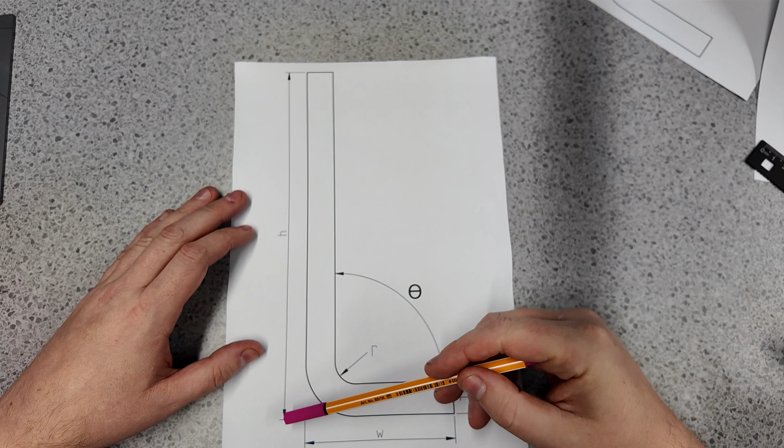So if we take our annotated drawing here, we'll always work with the outside dimensions, because if you've got a complicated bend, it might not be possible to measure the inside dimensions, and it makes the maths easier.

There's an angle that we want to bend. And then, as I mentioned before, there's this inside radius, which, depending on what we're making, may or may not be critical. But we've only got a few finite choices of this, depending on the tooling anyway.

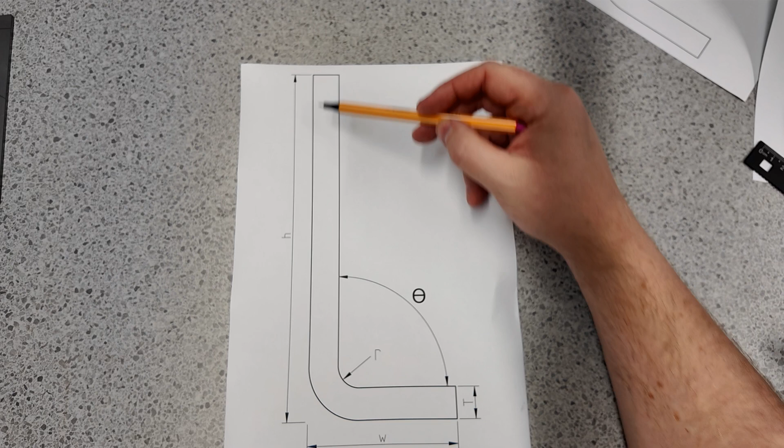I just want to emphasize what the mould point is. So this dimension from here to here, h as is shown, we could measure with, depending on the size, a big pair of calipers, a tape measure, or a height gauge. But the inside measurement, as I said, can be harder to measure.

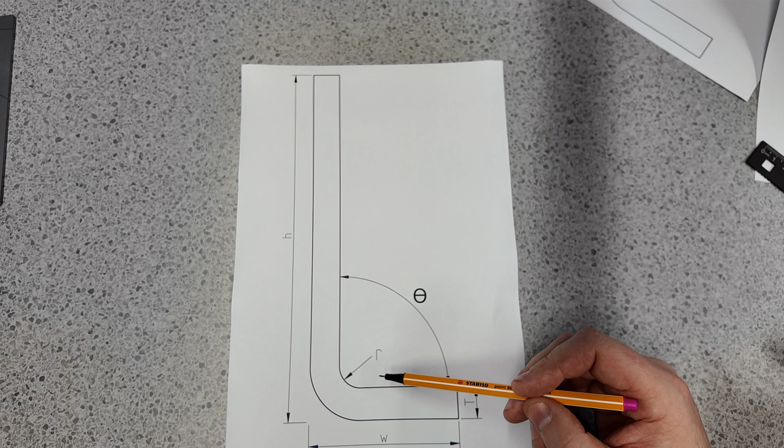And then there's the material thickness as well. So the combination of the choice of material thickness and the tooling, which will affect the inside radius, affects the inside radius. So let's get on with deriving it.

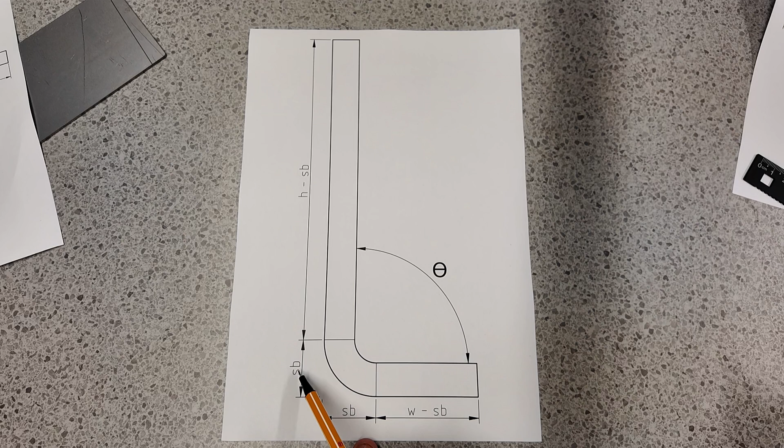This is the same drawing I just showed previously, but we've got some more annotation. The strategy is to compute this value here and here, which is the offset in each axis, called the setback. We're going to subtract that from h, subtract that from w, and then add in some material to account for the fact that there's a curve here.

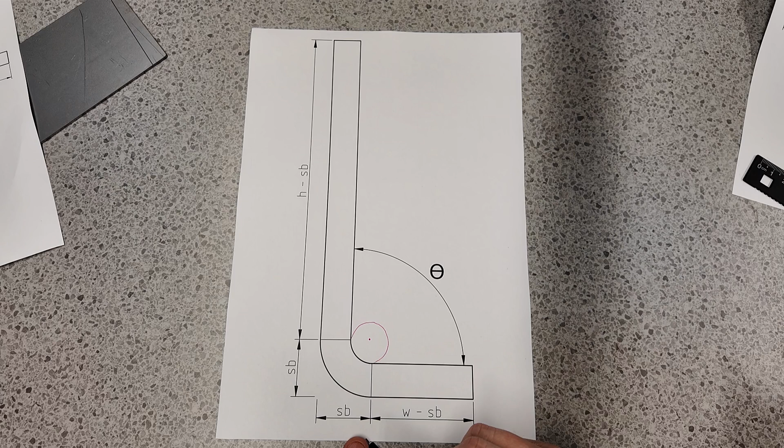The first thing to note is that this is a radius, and a radius will have an origin, a center. So we can think of a circle, my very badly drawn circle here, that goes around here. For 90 degrees, we can easily see what the setback value will be if we pretend that I've drawn this properly.

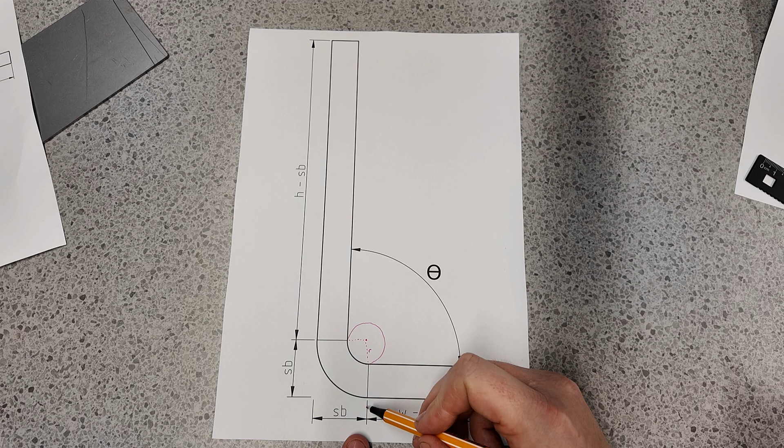We've got one here to here. Then we should be able to tell that if we know the radius of this circle, that's r, you can see that this setback, and that's r as well obviously, this setback is r plus the material thickness. So for this 90 degree case, the distance from here...

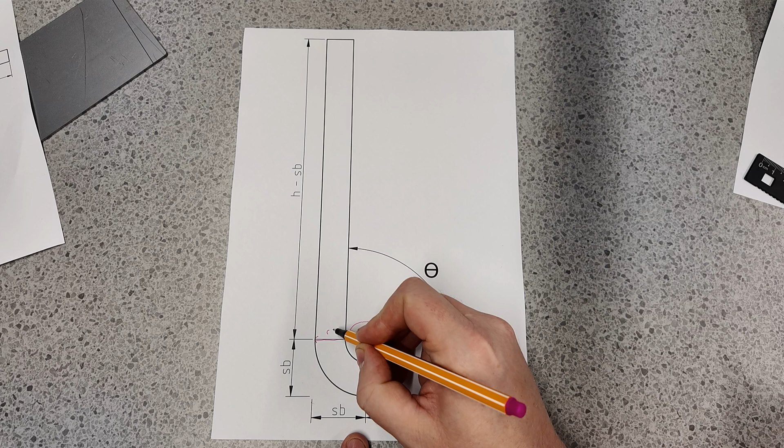...all the way out to here is r plus the material thickness t. And similarly, because it's 90 degrees, this one here is r plus t. So this one is r plus t as well. So for the 90 degree case, we can say that the setback is r plus t.

Now, what happens if this angle was not 90 degrees? That's the next thing to consider. So what about when the angle isn't 90 degrees?

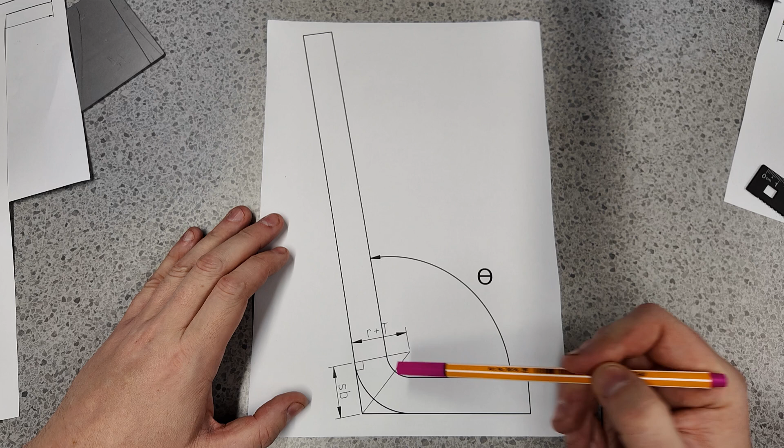So I've actually drawn this as 100 degrees here. So one side of this triangle is still the radius plus the material thickness, but the other side is no longer equal to that. So we have to compute this based on what we know.

So we know that this angle here is half of this angle, because we're assuming that half of the material goes into that side of the bend and half of the material goes into this side of the bend, and we're going to bend it in the middle.

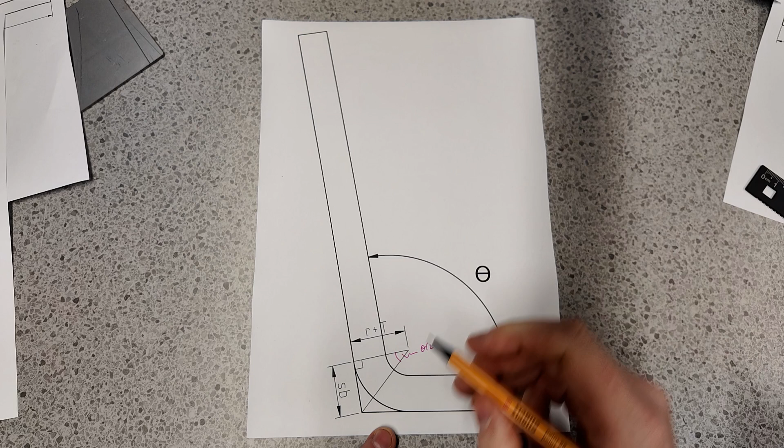So we can use the basic rules of right angle triangles. We know that for this particular triangle, where this angle is theta over 2, tan of theta over 2 is equal to the opposite over the adjacent.

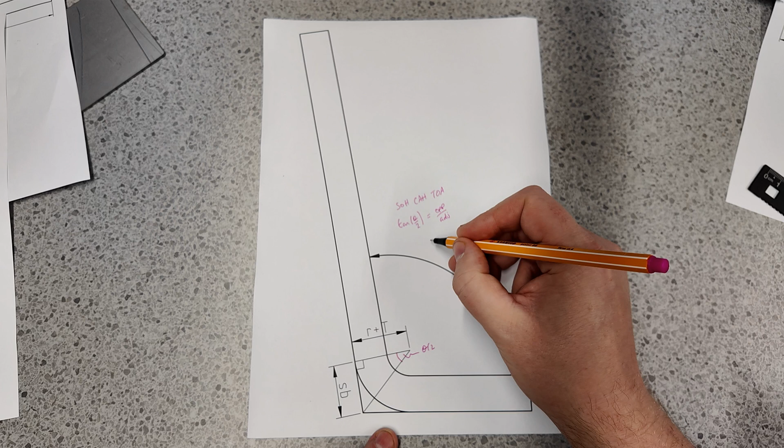In our case, the opposite is the setback, and the adjacent is r plus t. Therefore, the setback is r plus t times tan theta over 2.

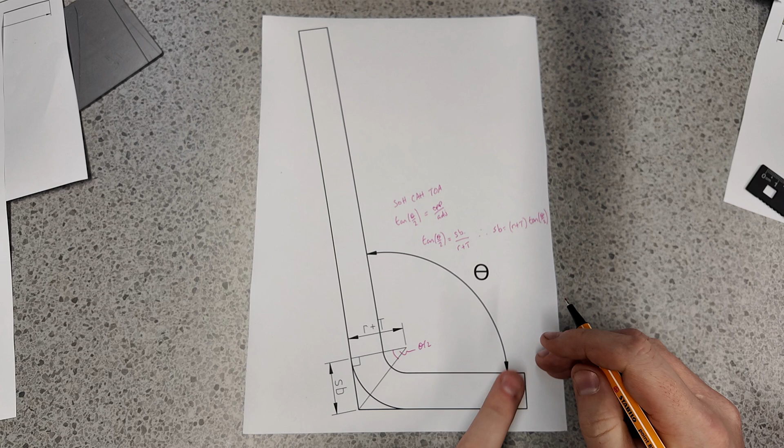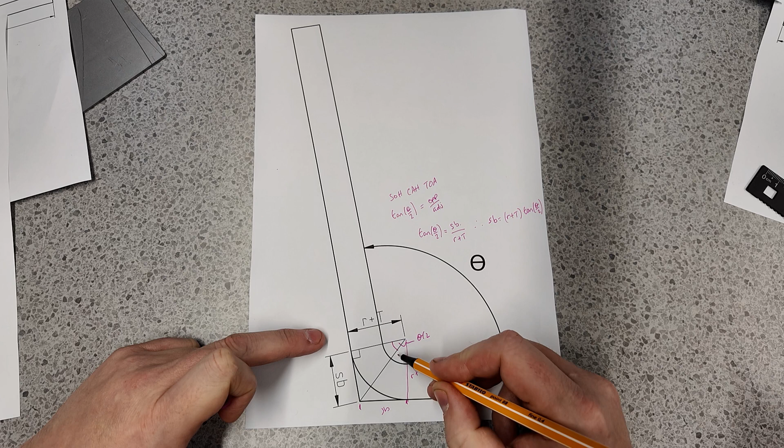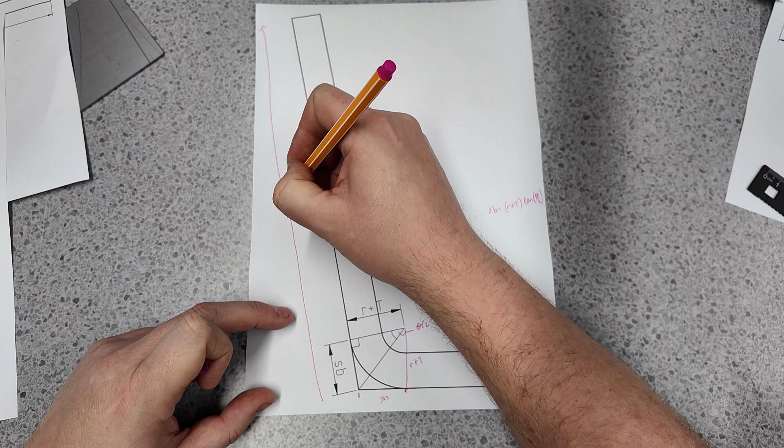This whole side here is h, and this is w, from the mould point all the way to the end. So what we've got to do is our flat length is going to be h plus w minus 2 times the setback.

Plus some material, some length to allow for this material that's going to be stretched around the bend. So plus something, and that's normally called the bend allowance.

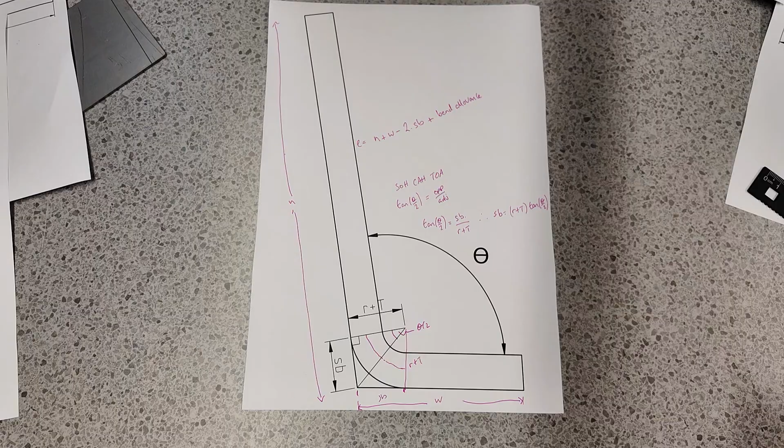Just to write that out: h plus w minus 2 times r plus t, tan theta over 2, plus bend allowance.

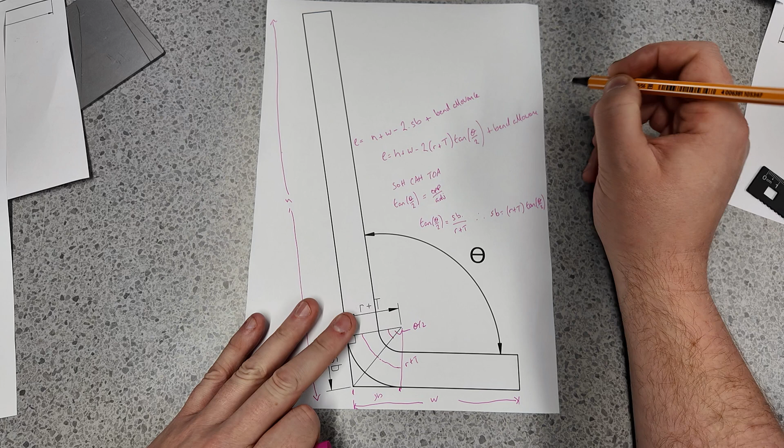Just to make that a bit more readable, this is where we are so far. We've got our outside dimensions h and w. We subtract the setback, and then we have to add in the bend allowance, which we haven't computed yet.

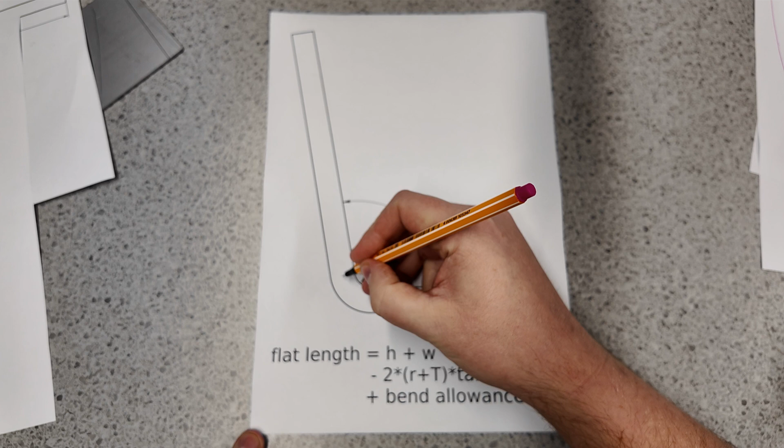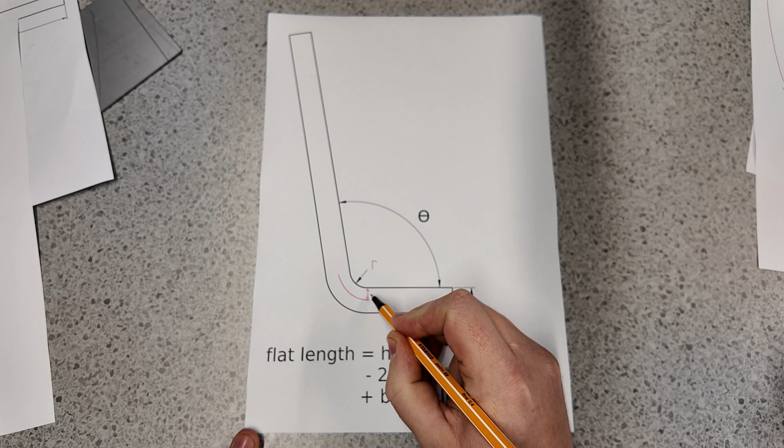So the bend allowance is very simple. It's just the length of the arc along what's called the neutral axis, which, depending on the material you're bending, occurs at different points on the metal. When you bend this, the outside stretches and the inside compresses, but there'll be a point some distance measured from the inside, between 0 and 1. If you were here, you'd be right on the inside, and here on the outside.

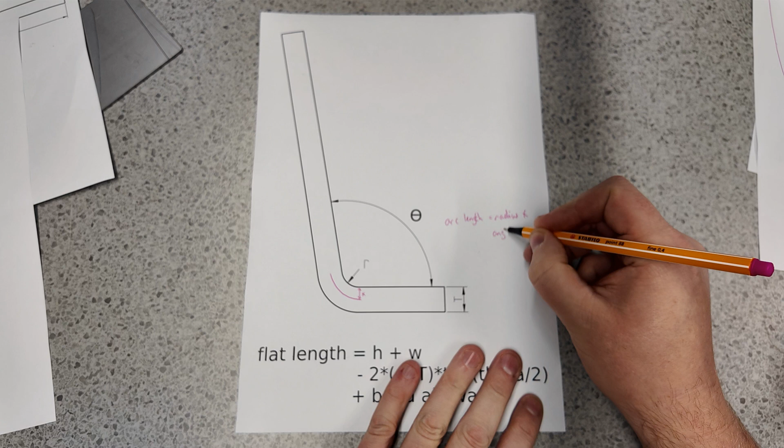So that's k, between 0 and 1, and then it's just the length of that arc. So we know that arc length is just the radius times the angle in radians.

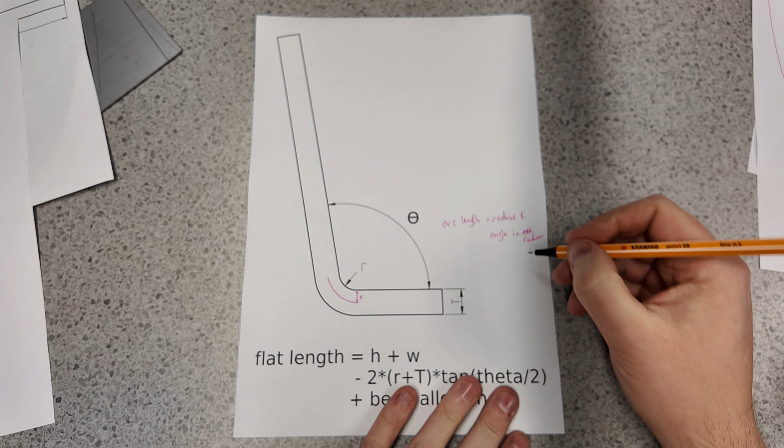So the question is, at what radius does this arc come out? Now that depends on the material and the particular batch of material and all sorts of strange factors. But for steel, 2mm steel anyway, that I get from the laser cutter, I've found that k is approximately equal to 0.4.

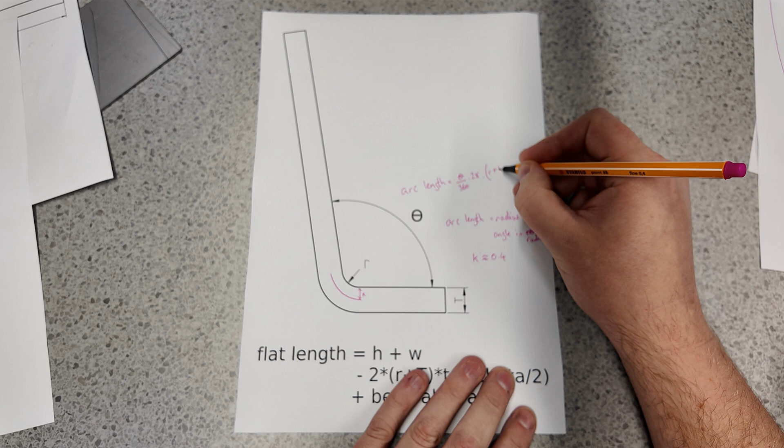So the length of this arc, the bend allowance, is theta divided by 360 times 2 pi times the radius, and the radius is the inside radius plus some factor k times t, where t is the thickness. So whatever fraction of t we are away from that is the radius measured from the origin of that curve. That gives us our final formula, which I shall show on the next slide.

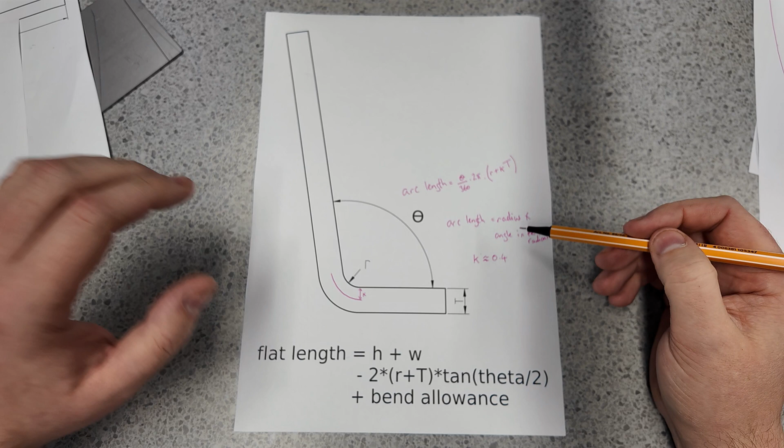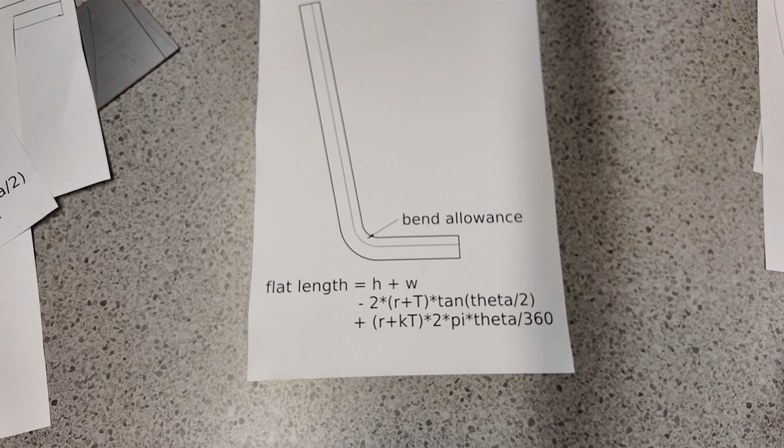So here's the final formula for an angle theta, 90 degrees or greater. This line represents a setback, this line represents the bend allowance, which I did draw in a different colour, but it only printed in black and white.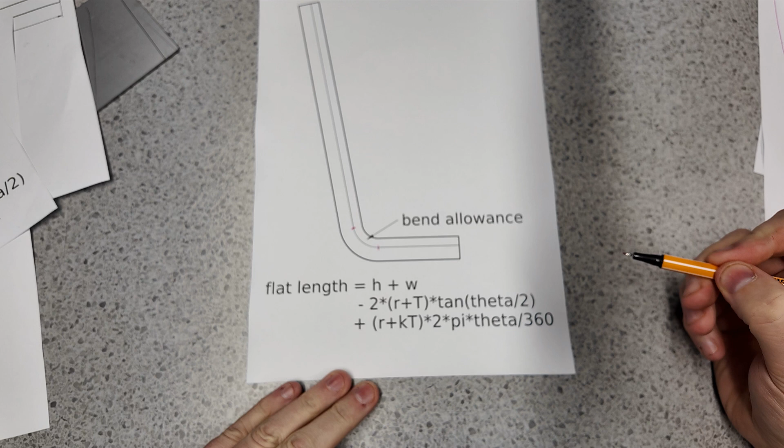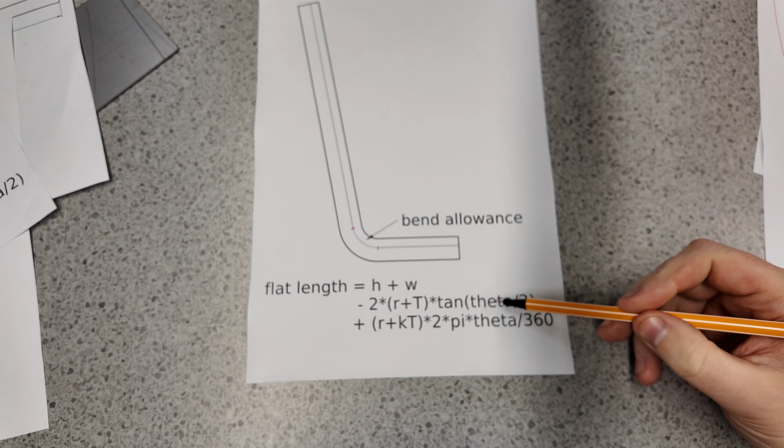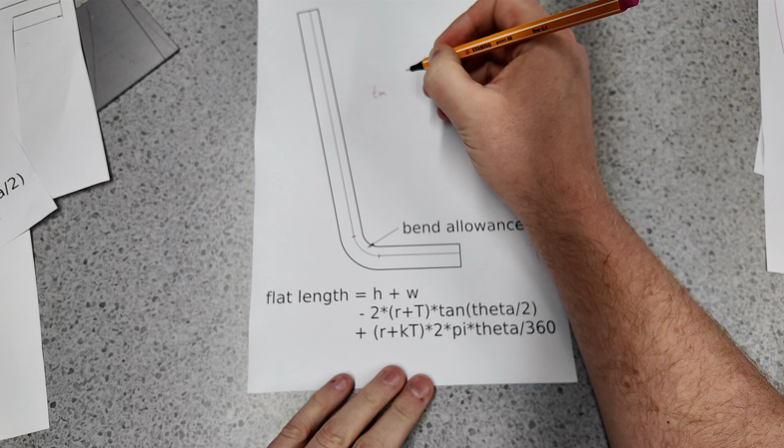And that's the formula. Now, we should be able to see that this will reduce a bit if we're bending for 90 degrees, because we know these will evaluate to something nice. So for theta equal to 90 degrees, that's equivalent to pi over 2, and tan of pi over 4 is just 1.

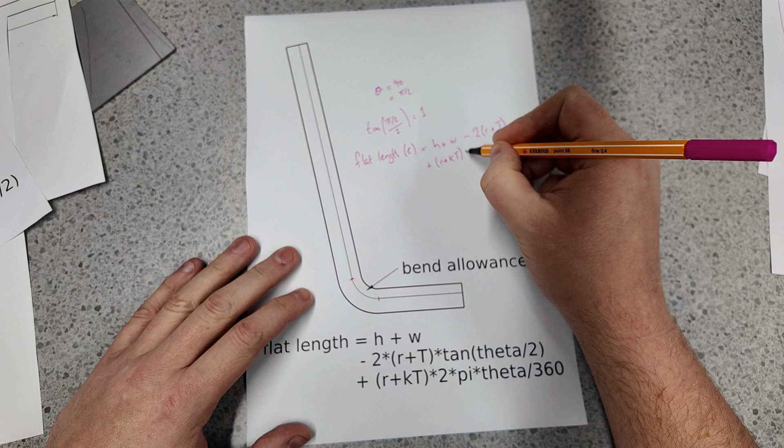That leaves us with our flat length, which I called L on an earlier slide: h plus w minus 2 times r plus t, plus r plus kt, and that angle term will just be pi over 2, which is about 1.5, since I'm assuming the angle was in radians. And that's how you compute the flat length.

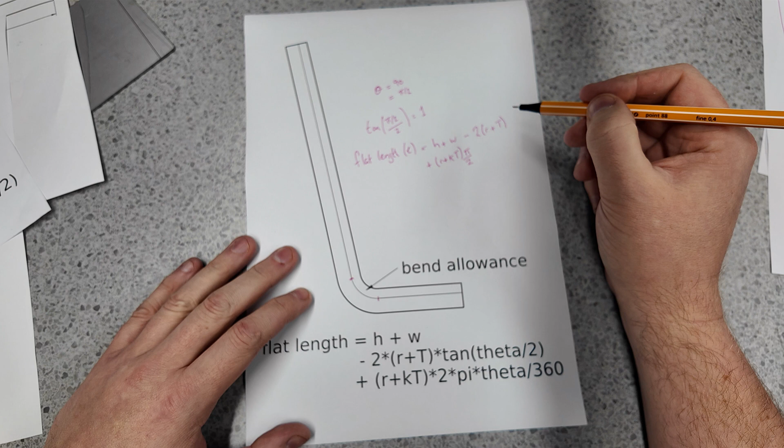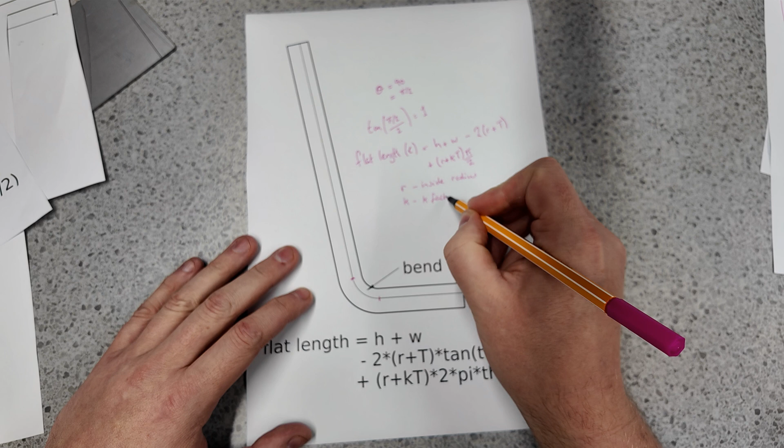So the things we have to decide as the fabricator are r, the inside radius, and k, the so-called k factor, which depends on our material. For the purposes of the demonstration I'm doing here, we're going to use 0.4.

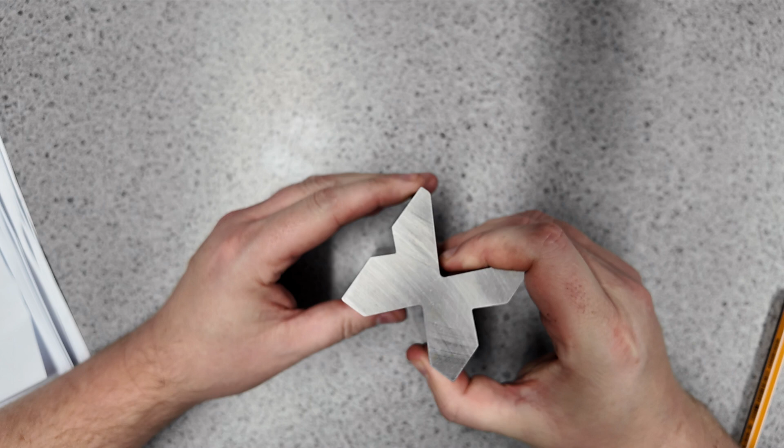One more thing before we do the worked example. I want to talk about how you calculate the internal radius of the part. This is defined, when you're doing this kind of air bending, by the width of the V.

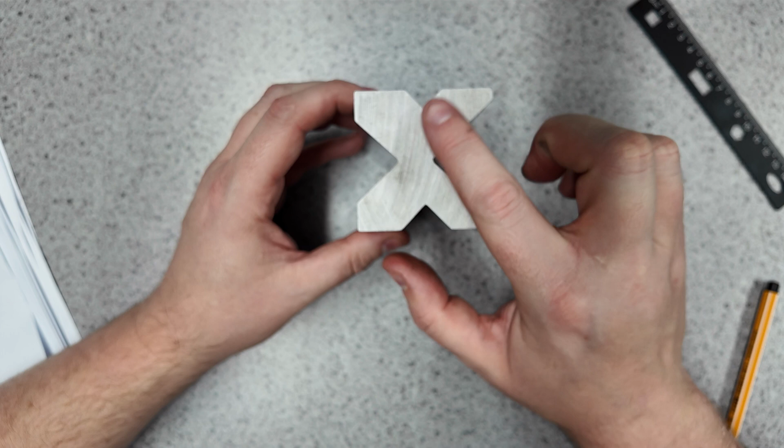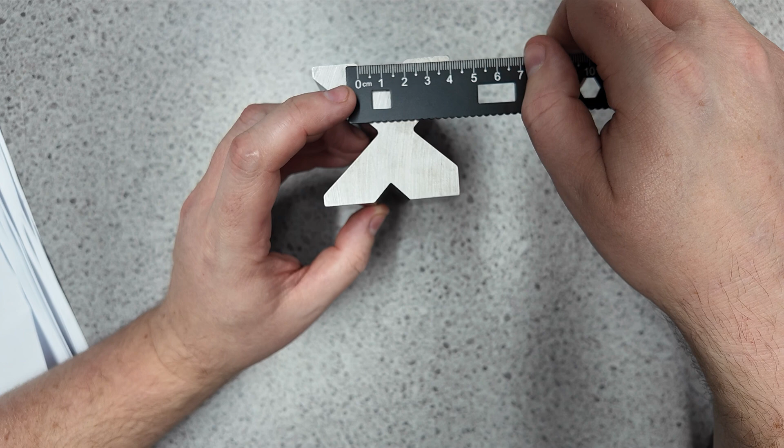This is a bottom tool, and we'll see it when we go to the press brake in a minute. It can be mounted so you can use one of any of these 4 V's, and the key parameter is their width. This top one is 16 millimeters wide, this one's 22, this one's 35, and this one's 50. For thicker material you have to use a wider V, otherwise you end up crushing and damaging the material.

For what we're doing, which is 2 millimeters, we're going to use the 16 millimeter V. There's a very effective rule for computing the internal radius based on the V width: the V width divided by 6 is the internal radius. So R equals V width over 6. I've found this to hold for all the sizes on this standard V, which is 16, 22, 35 and 50.

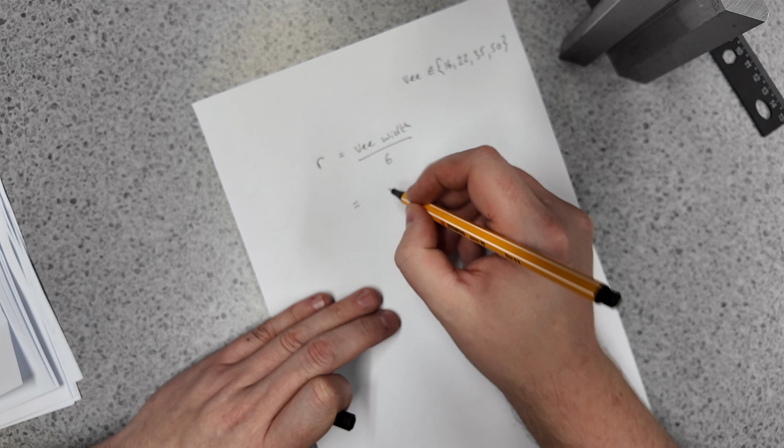So you can see that if you increase the width, you get a bigger radius. For the one we're going to do today, we're going to use 16 millimeters, so 16 over 6 is 2.67. Sometimes for 2 millimeters I also use 22 millimeters, and 22 over 6 is 3.67. This is the inside radius, and it should be fairly obvious from the drawings we've already done that the outside radius is just this plus the material thickness.

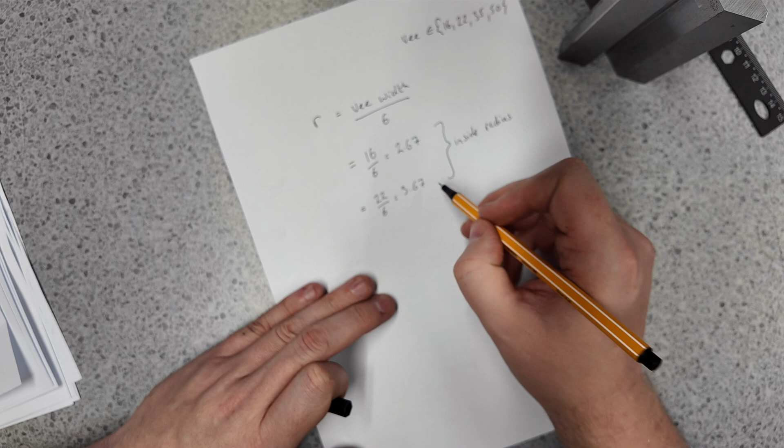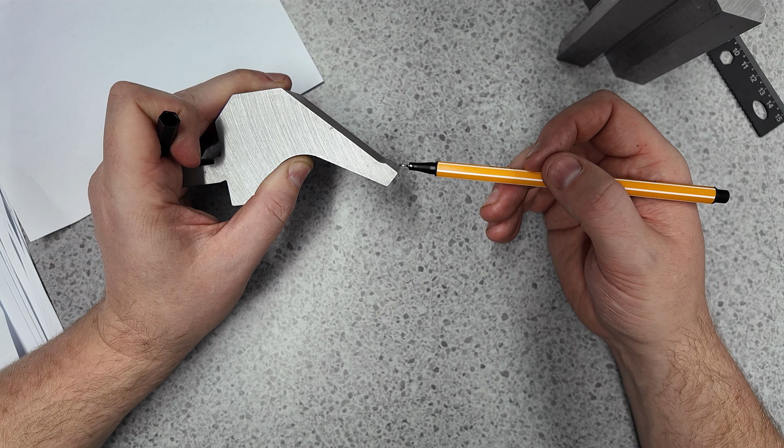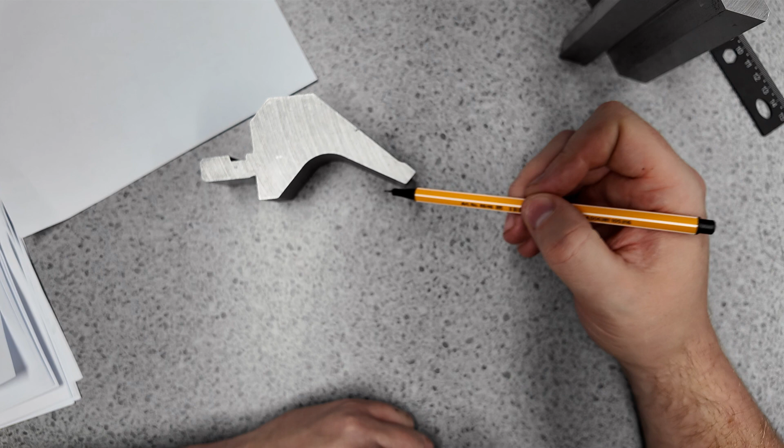The final point about the top tool: this has a radius of about 0.8 millimeters, and bending up to about 8 millimeter steel, I found it doesn't really matter—it doesn't impact your calculations at all. When you get to really big radii and things that aren't normal, this starts to have an effect. The top tool has more impact when making complex shapes and parts bend round and hit it. This is a gooseneck tool, so you can have some folding back, but straight tools are also useful, and you can get all sorts of elaborate shapes with holes in them, etc.

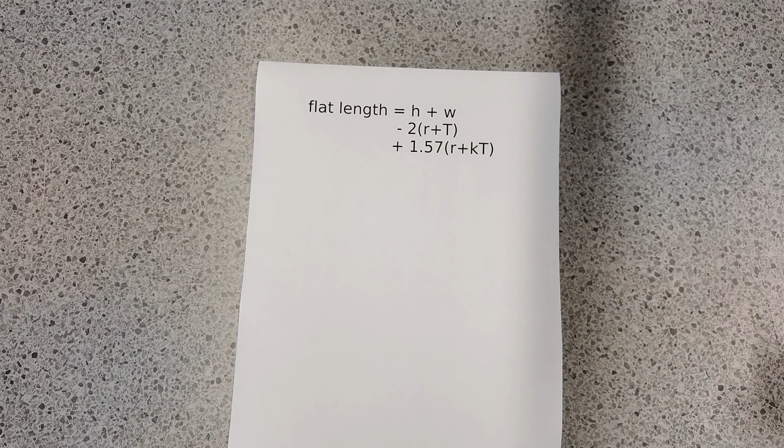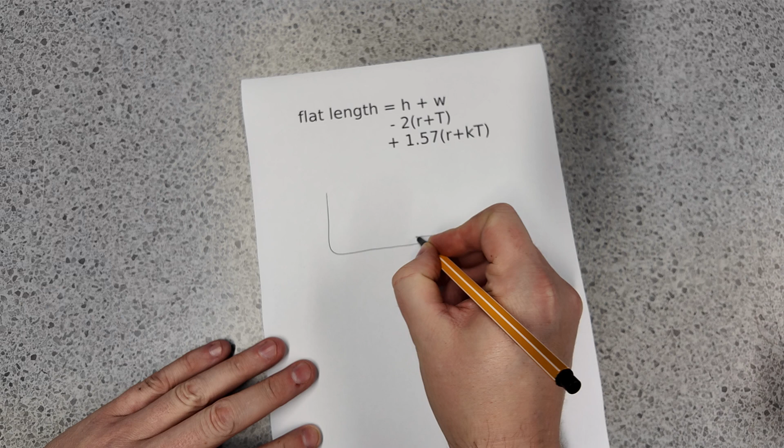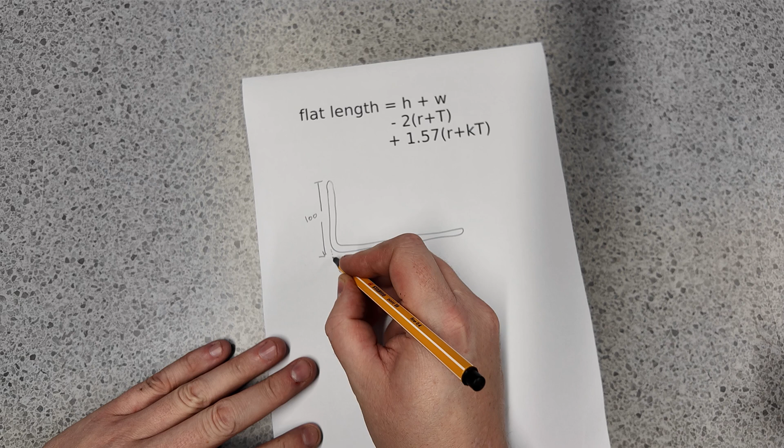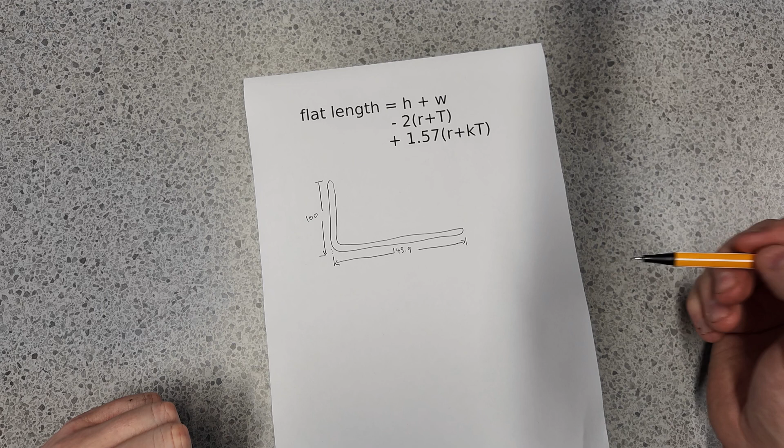Okay, so now we're going to do a worked example of a 90-degree bend, and I'm going to make up some numbers for our purpose of our example. So we want to make a piece in 2 millimeter steel, where this dimension is 100—remember, outside dimensions—so the imaginary mold line, and this dimension is 143.9. What we need to do is work out the length of the flat piece, get that ordered, which will happen magically because this is a video, and then we need to work out the point that we're going to bend it at.

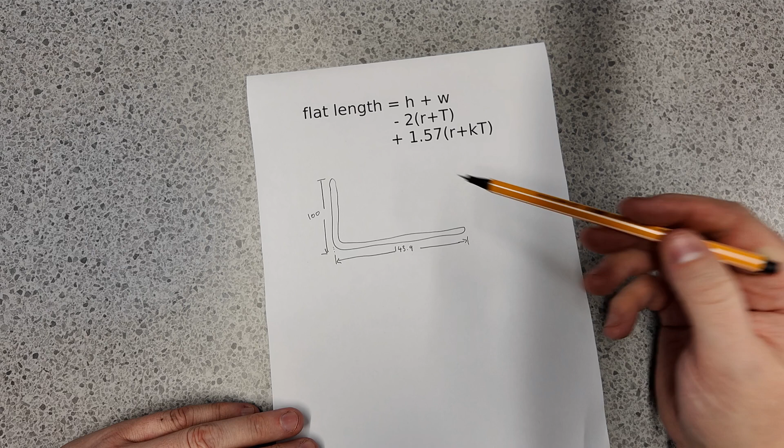So what do we do here? We've got h equals 100. Need to keep this square on for the camera. H is 100, W is 143.9. R—we're going to use the 16 millimeter V, so R is 2.67. The material thickness is 2, and the K factor that we're going to use is 0.4.

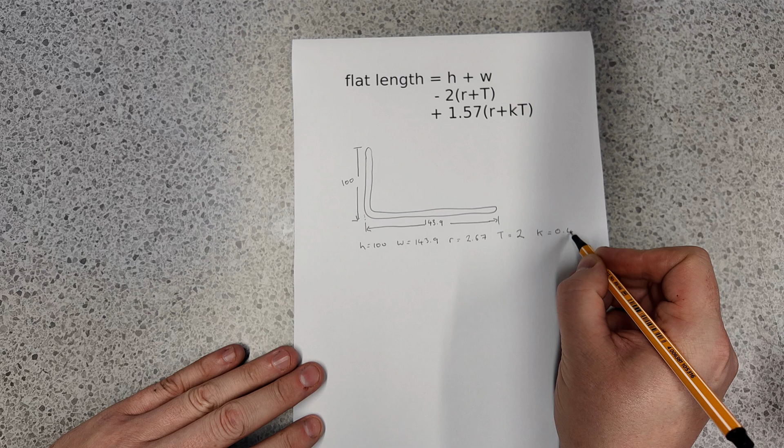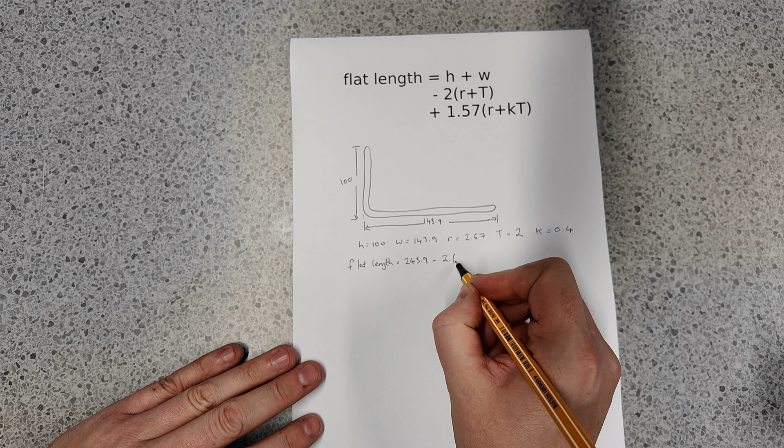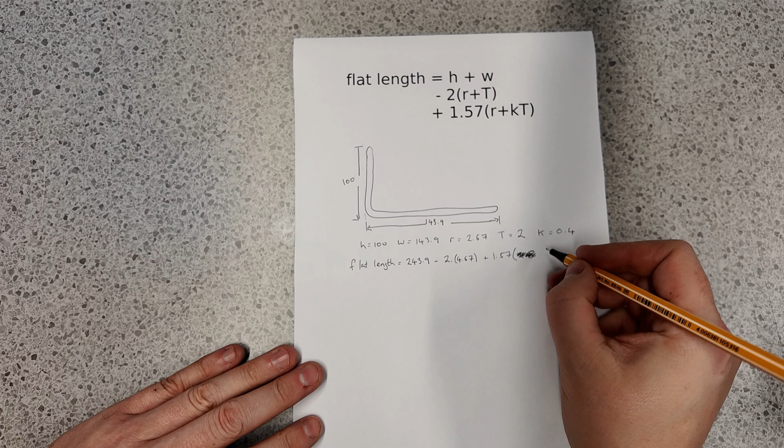So if you work this out, flat length is 243.9 minus 2 times 4.67, plus 1.57—that's pi over 2—times 3.47.

Okay, so we can work all that out, which I'm going to do on the calculator shamelessly. And all of that works out to be 240.0079, so we'll call that 240 millimeters. So we need a flat piece of steel that is 2 millimeters thick and 240 millimeters that way.

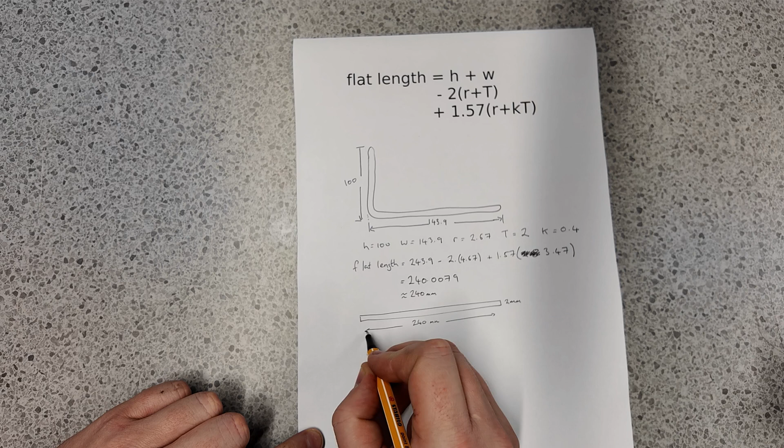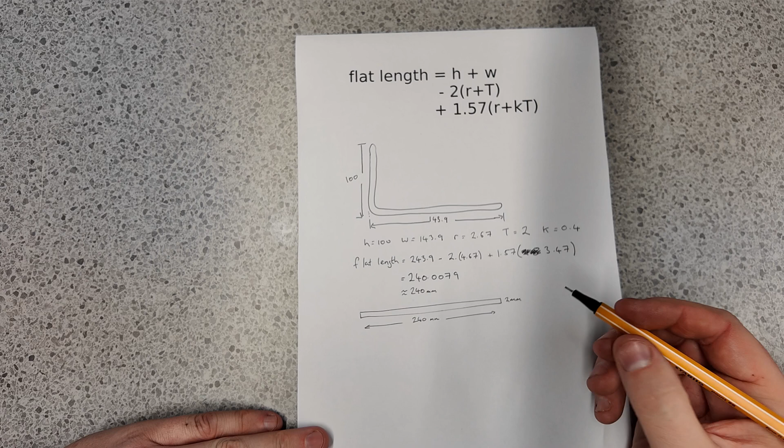And then the other dimension, the dimension into the page, doesn't really matter for the purposes of this example, but it does affect the bending depth parameter on the press brake. So I think the piece we're using today, the dimension into the page is 80 millimeters, although that doesn't affect any of the calculations we're doing here.

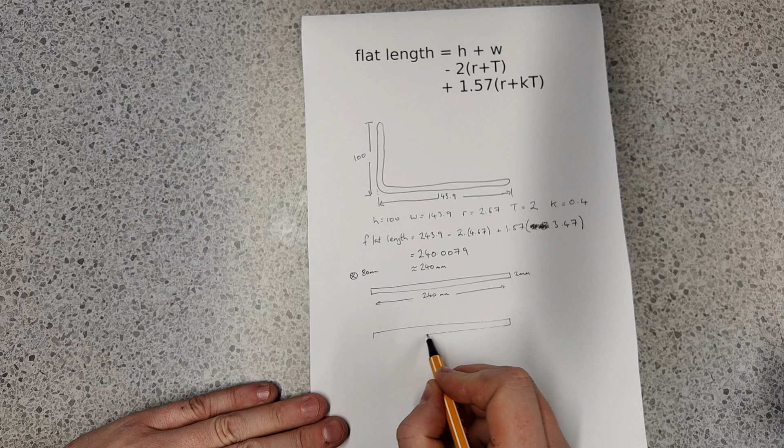So we know the length. Now we need to know the point where we bend it. So we've got our flat piece of steel, we've got our two things here. So we've got h minus the setback, which is this distance, and then we've got w minus the setback, which is this distance. And then we've got here, which is the bend allowance. We want to bend right in the middle, so that whole thing is the bend allowance, which is this term.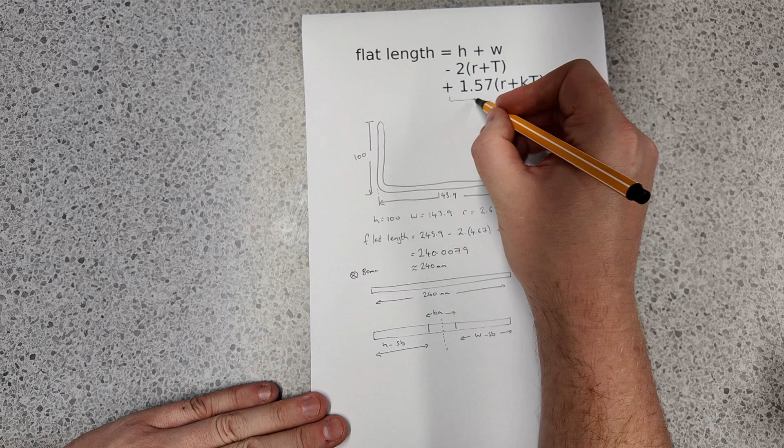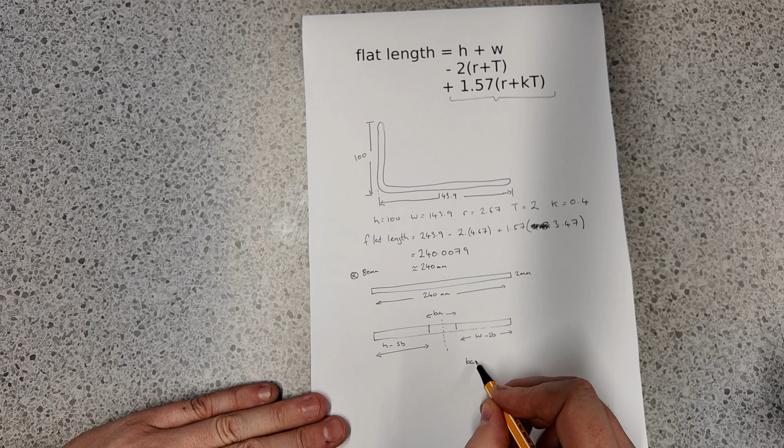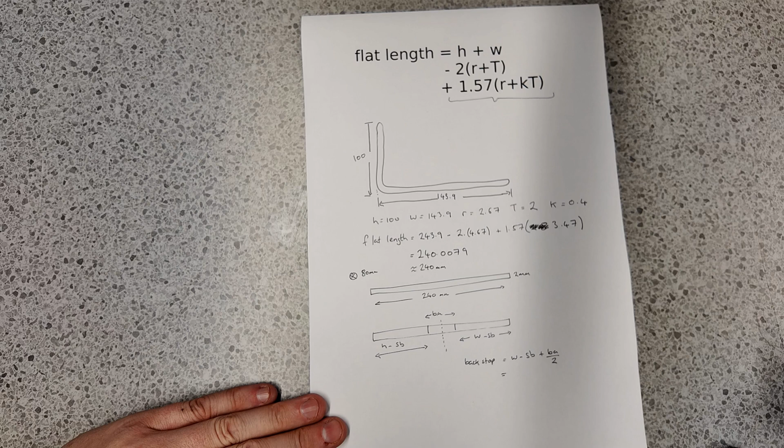So obviously, assuming we're bending in the middle, the position we want to bend at, which is the setting for the backstop on the press, so we're going to call that backstop, is W minus SB plus BA over 2. And that I'm going to work out on my calculator: equals 143.9 minus 4.67 plus 2.72 is equal to 141.95. So that's the distance if we're going to bend from this side.

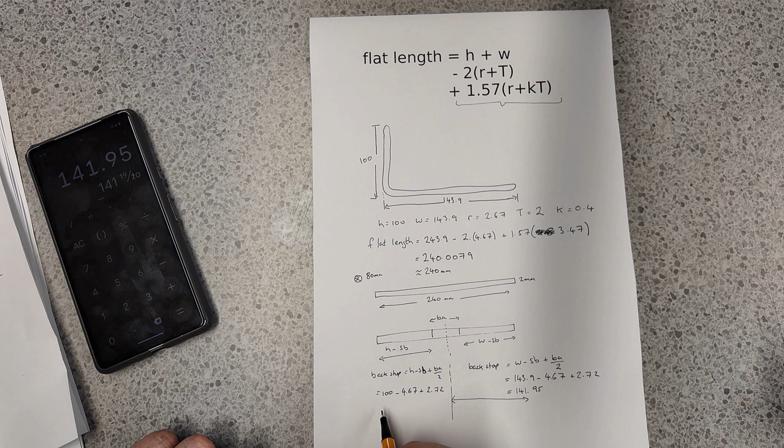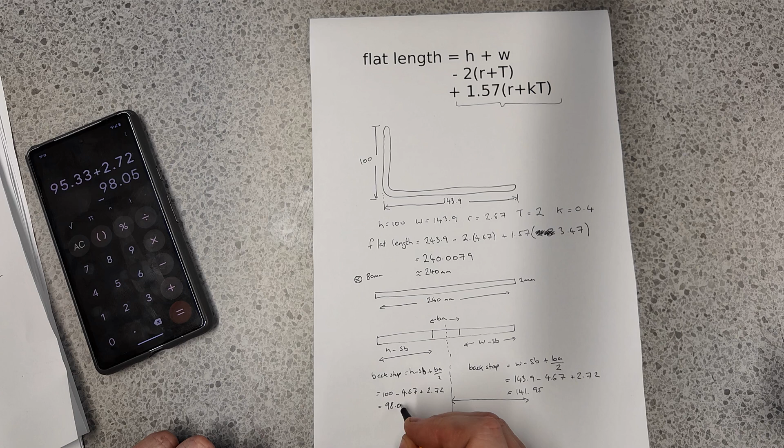Similarly, we could equally, for this particular part, it's just such a simple bend, we could bend from this side. So the backstop would be H minus SB plus BA over 2, is 100 minus the setback, which is 4.67 plus 2.72, it's going to be about 98, isn't it? 100 minus 4.67 plus 2.72 is 98.05. So we can bend from that end or bend from that end.

So let's take our blank down to the workshop and give it a bend.

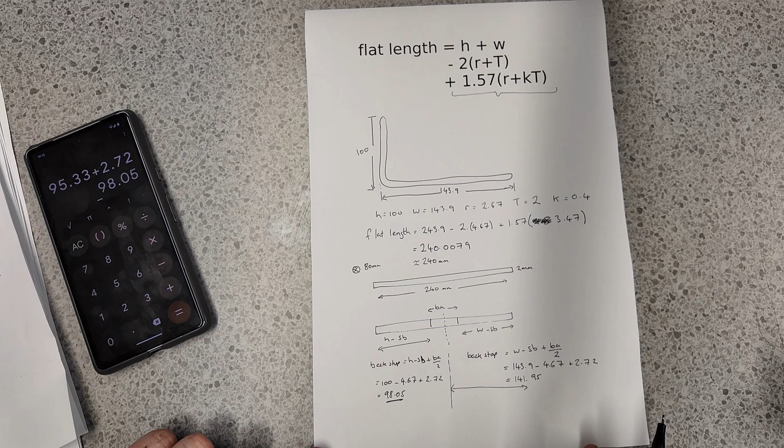Okay, so we've got the press brake set up using the 16mm V. Should give us an inside radius of 2.67mm. We're going to bend this 240mm long flat, and our target dimensions are a vertical of 143.9 and a horizontal of exactly 100.

So I've already set the press up to give us an angle of 90 degrees when we bend it, which is a different topic. Hopefully if you've got a CNC press, that'll be easier for you. So there we are, we're all lined up, and let's bend it.

Well, it looks pretty good. We'll test it on the flat plate in a moment. Let's go over to the flat plate.

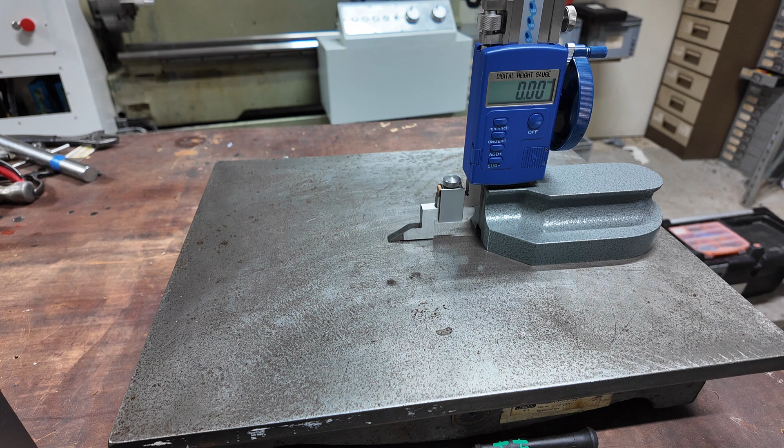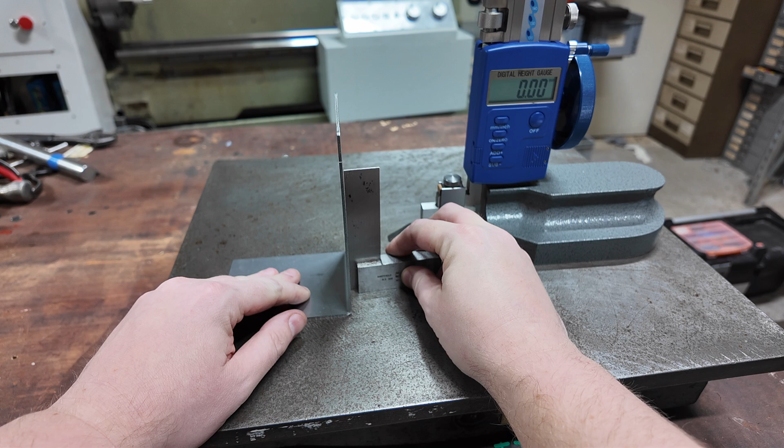Okay, so here we are at the flat plate, surface plate, and we're going to measure the part we just bent. First of all, we'll just check it for squareness. Well, it's pretty square, but it's not perfect. I could probably have, it's probably overbent, ever so slightly. I probably could have knocked another 0.05mm off the bending depth, but it's good enough.

Right, so now we're going to measure the height. So according to the drawing and the calculations we did upstairs, the vertical height here should be 143.9. So let's go, I'm going to have to adjust the camera angle.

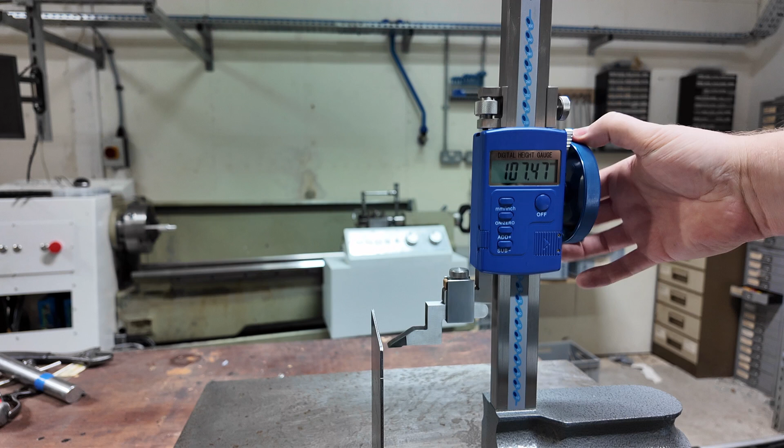Or measure it in the middle first, and then we'll see how square the bend was. Oh! Oh! Well, that was surprisingly accurate. 143.89. Let's see how it varies. Zoom in a bit.

See that? Yeah, let's see how it varies if I... Yeah, so it wasn't quite perfectly square. The backstop on the press isn't perfectly square. So 143.93, 143.87, and 143.86. So that's not bad.

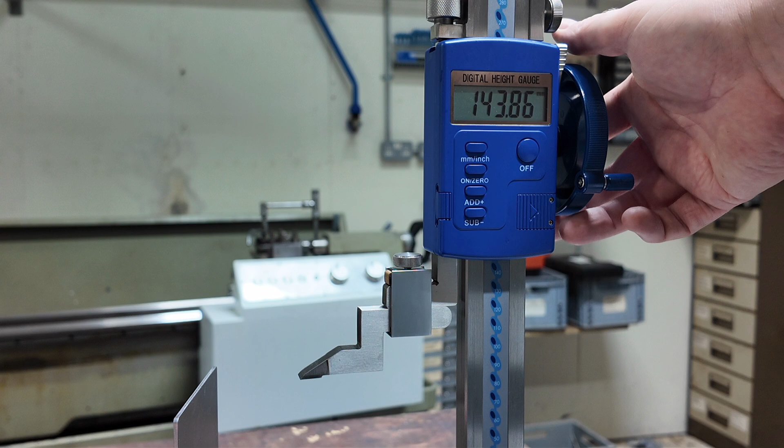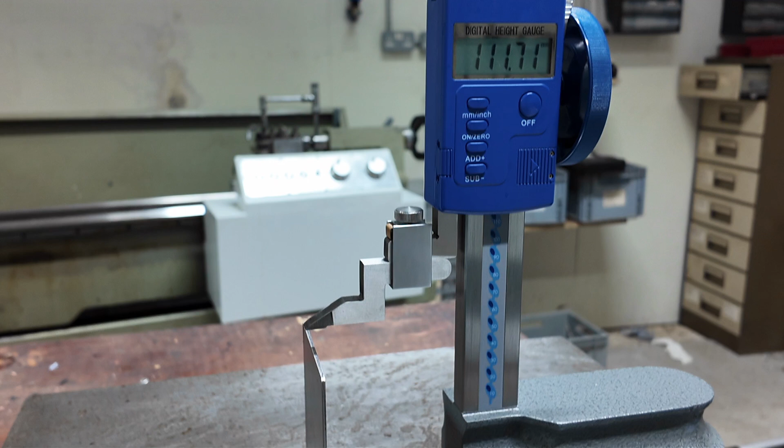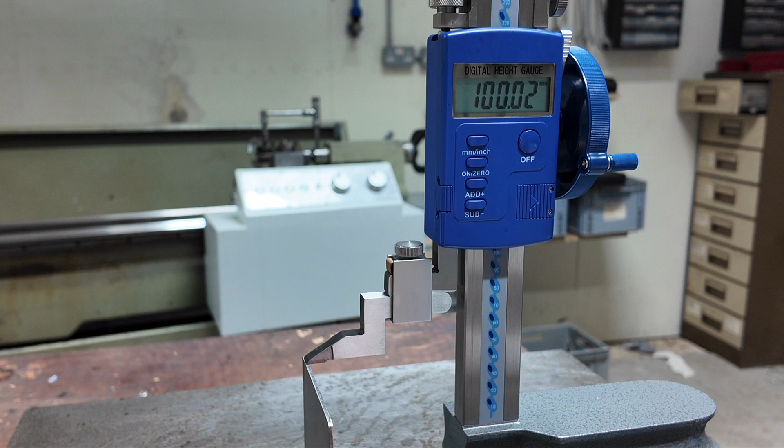Now, if all the calculations are correct, the other flange should measure pretty much exactly 100mm. So, adjust the shot slightly. So I've turned it around, that's the other flange. Hopefully it'll come into shot. I'm going to have to bring it up. Right, here we go. Oh, 100.02. It's pretty accurate. 100.01. So it looks like we are 100.02.

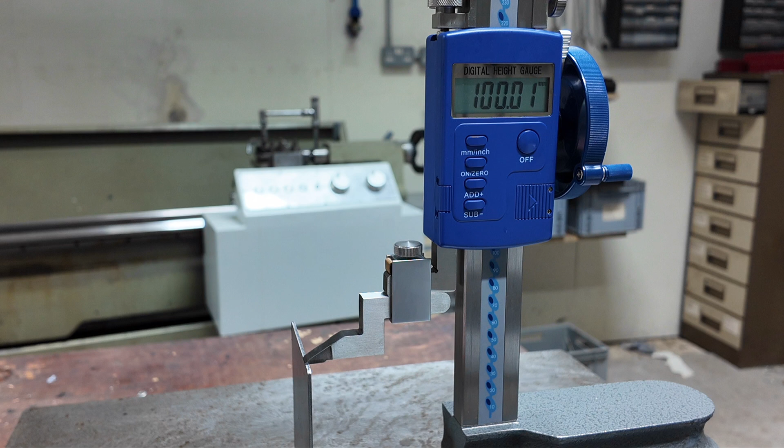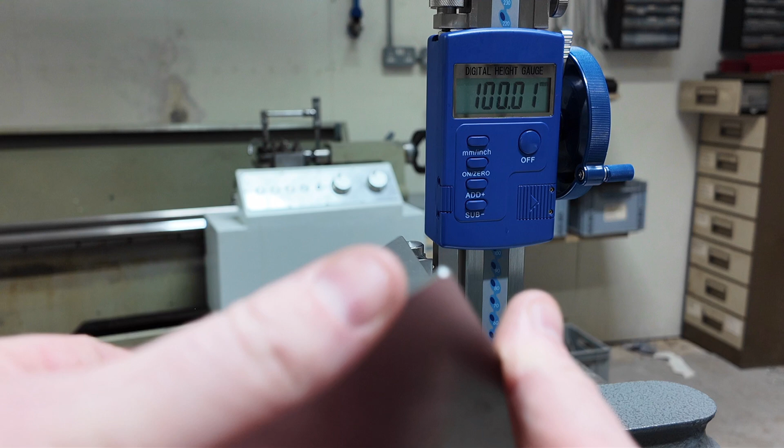We're about 0.1mm out, which isn't terrible, but it does show that the K factor is about right. I suspect the sources of error are most likely the backstop accuracy on the press. Also, you sometimes get artifacts from the laser cutting, so if there are any artifacts on this edge, that can affect it as well.

So there we are, we've bent this 240mm long plate into a flange length of exactly 100 and the other flange of 143.9, all plus or minus 0.1mm, which is reasonably satisfying.